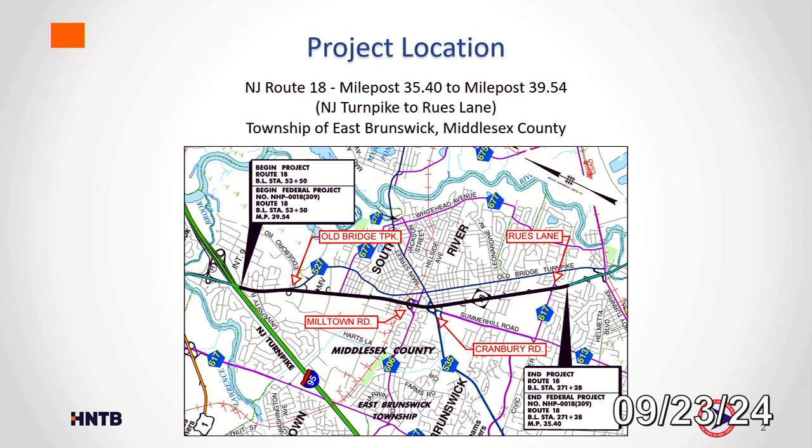So the purpose, need, and benefits of the project: one of the first items that was identified for the initial need for the project is to rehabilitate the pavement between those mileposts. So we have areas of the right lane and shoulder areas that were substandard pavement depth that will be repaired to full depth. The original use of the roadway was as a shoulder, and then at some point in time it was converted to a lane, but it was still riding on a thinner pavement section. So those areas will be reconstructed to a full depth. In addition, the entire width of the roadway will be resurfaced by the end of the job.

The project will also serve to alleviate drainage deficiencies and flooding. There are some areas of Route 18 in this corridor that were known as high incidence of flooding, and the improvements that we're going to institute by this project will help alleviate those sections. In addition, the intersections that I mentioned before, as well as a few other ones within the corridor, are going to get safety and operation updates by having new traffic signals put in to current standards, as well as new lighting at those intersections.

We're also going to be improving pedestrian connectivity in that there are sections of existing sidewalk that are not up to ADA code. Those will be upgraded to ADA compliance code. And we also had missing sections of sidewalk throughout the corridor, and those sections will be completed now to improve connectivity throughout the corridor.

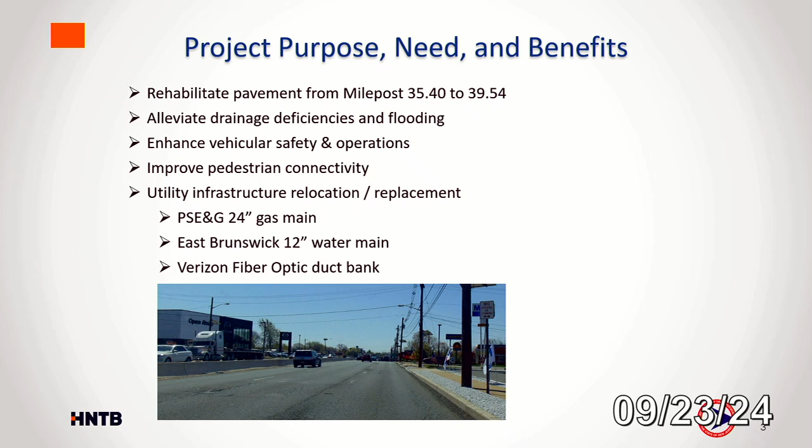So the contract was awarded to Earle Asphalt, the state's contractor, in the summer of 2022. They got started with construction in the field in earnest in January of 2023. Currently, we're anticipating the project completion to be in early 2028, although substantial completion of the project will likely be sometime in the fall of 2027.

Since the award of the contract, there have been some items of additional work added to it. One of them was the addition of about 6,000 linear feet of center median concrete barrier. The reason for this was the way that the project was designed initially. We were just replacing sections of the barrier that were in direct conflict with the drainage that we're putting in.

Once we got out here, we realized that many more sections were not in good shape. There's evidence of spalling, or the grade elevation was not quite what it should be with the roadway. So the state decided to add to the contract the amount of barrier that I mentioned here to basically complete it from one end to the other.

Additionally, more recently added to the project was nearly 8,000 linear feet of additional gas main relocation. Initially, just like I said before with some of the drainage work and the barrier, we were only touching sections of the gas main where there was a direct conflict with the drainage. What wound up happening with that is we had a lot of tie-ins along the way, and these tie-ins are probably going to be the biggest point of contention for traffic impacts.

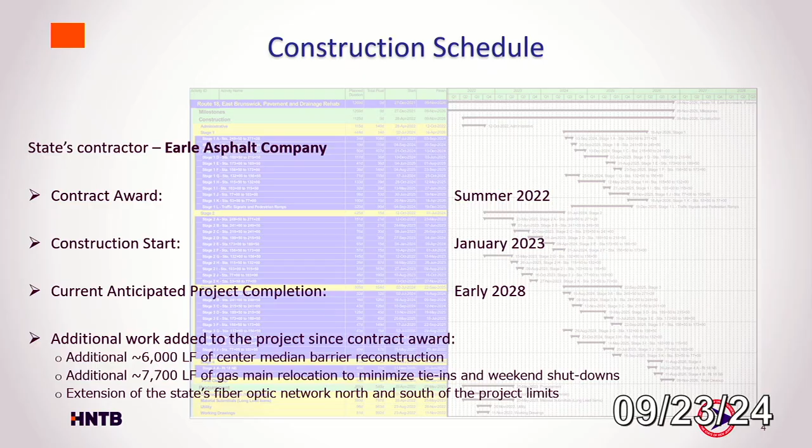The updates on current staging: you can see the northbound right lane from Icker Avenue to Arthur Street is closed right now. And the northbound left lane is closed from Racetrack Road to the southern limit, somewhere around the Gusto Grill. Another closure on the southbound side is the left lane closure, Icker Avenue to Cindy Way. That staging was just done a week ago. So this is our current situation.

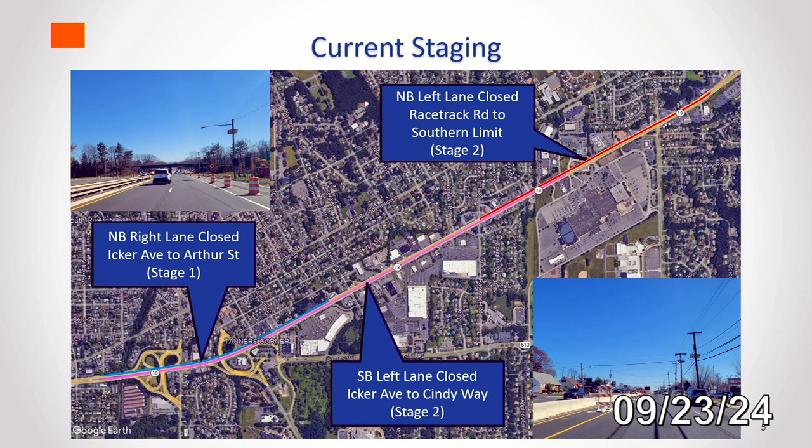The proposed long-term traffic pattern is from just south of Racetrack Road all the way up to the Conrail Bridge, which is Icker Avenue. We are setting up the left lane closure with construction barrier curb on both sides. And as you can see, the 2 yellow marks are our 24-inch gas main tie-in, from our old existing gas main to the new gas main. That's going to happen sometime next summer, 2025. The timing for the tie-in is Friday night, 10 p.m. to Monday morning, 5 a.m. It's going to be an around-the-clock operation, and Route 18 southbound at that time will only have one lane open to traffic.

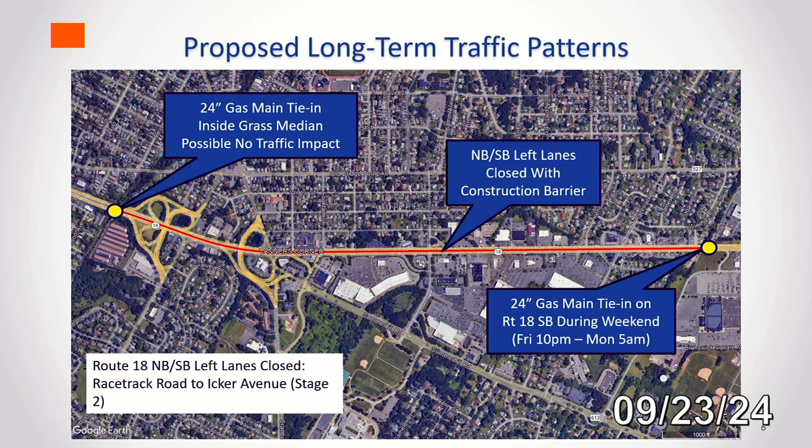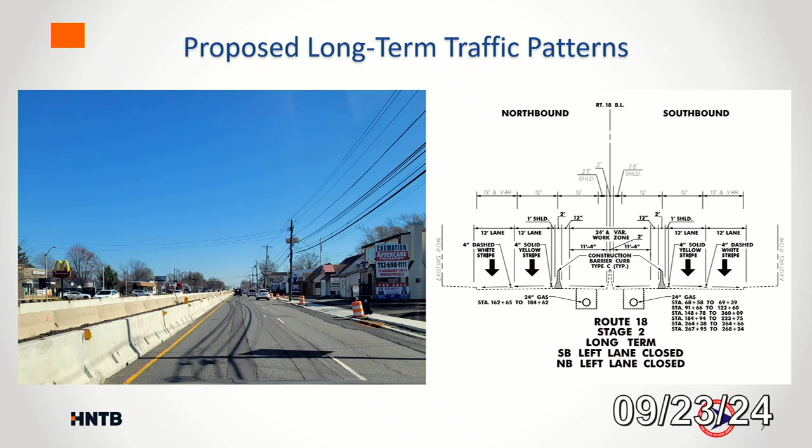So in the proposed long-term traffic pattern, the work area is set up in the median, and 2 lanes northbound and southbound are going to be maintained during the daytime. For detours within the project corridor, the detour plans are already set up for any specific street closure.

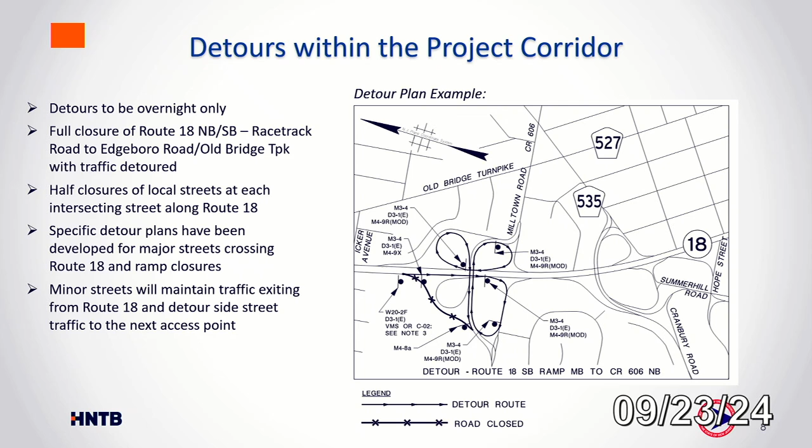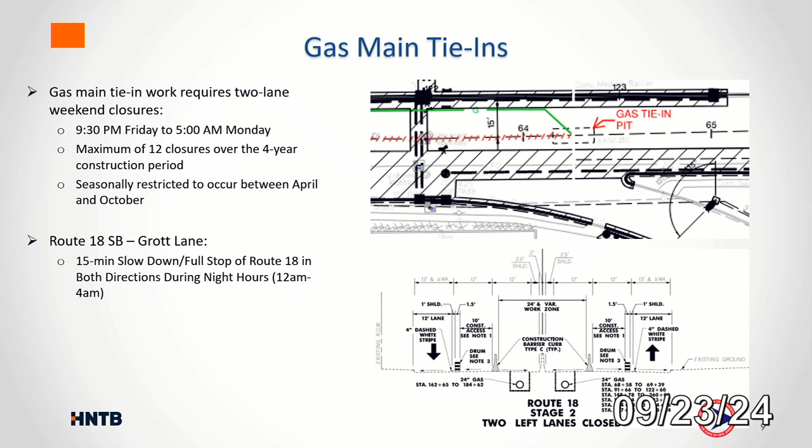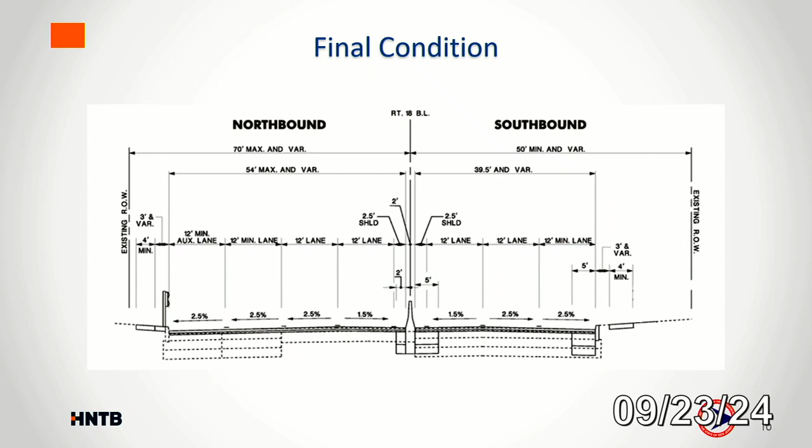I want to say a big thank you to the East Brunswick Police Department. In the last 2 years, we have had several emergencies on the job site, and their quick response on the job site made the situation safe for the motorists and for the citizens. So I want to thank the Police Department of East Brunswick. Any questions for Meredith? Now back to you.

We're going to turn it back over to you all. If you have any questions, like I said, I have a whole team here to answer any of your questions or concerns. And if you don't, we will always be around to answer all questions and concerns. Joe definitely knows my email address.

We were told a four-year project. And so if things began in 2022, we are halfway through. So are we halfway through? I would say we're close to it. Okay. Yeah, I mean, I'm not in construction, I'm into running governments. So there's delays and all that kind of stuff that goes with it. I get that. And so it's not as if you said to me, oh boy, we're really behind schedule. But again, the community was told repeatedly through Mayor Cohen's efforts that it's going to be a four-year project. And so we're 2 years into it.